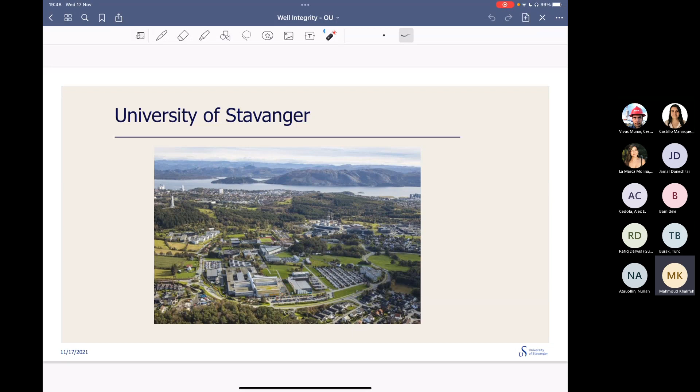A little bit about my university. Yes, I work at the University of Stavanger. Those that are familiar with Norway know where Norway is located. I will show you a Europe map. This is our campus area, this is north, and this is a drilling rig which is used for doing research. For your information, Norway has no onshore wells. All the wells are offshore. I'm coming from the Faculty of Natural Sciences, which is located here. And we have SWIPA, a lab for subsurface well integrity and permanent abandonment, which is located in this part of the building.

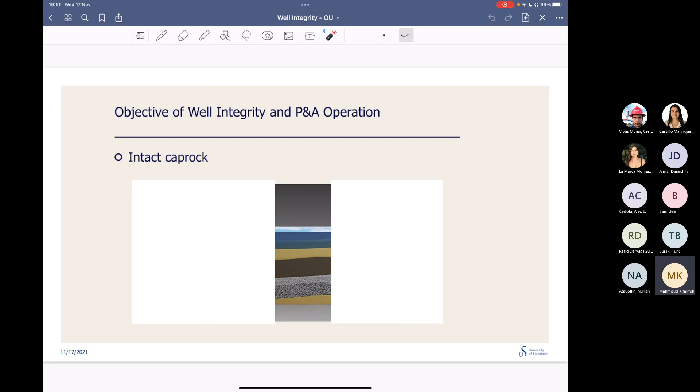So, assume that this is your reservoir. It doesn't make a difference if you want to call it a hydrocarbon reservoir, or a geothermal, or CCS. Okay. As long as there is a formation which contains the source of energy you're looking for, and there is a caprock on top of that, then this is a reservoir. It means that the source of energy has been trapped and cannot escape.

Okay. So what happens during drilling? Actually, the drill bit penetrates the caprock and enters the reservoir. What we do in the reservoir section is not of interest with respect to well integrity and P&A. What's important is the area where you have the caprock. If you could maintain this area, the caprock functionality, then this reservoir is secured and you can produce the type of energy you're looking for. Okay.

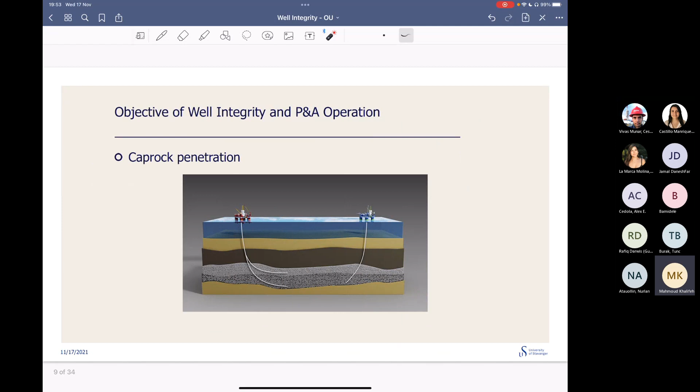Sometimes we have different wells drilled from the same area, which is actually a platform. And then we penetrate the caprock either one time or two times at the same depth. Okay. And we need to ensure well integrity in this area, which is caprock functionality. Let's talk a little bit about what was the real scenario. You have a reservoir, a source of energy, which was protected by a caprock. Now I'm talking about hydrocarbon wells.

When we drill through the caprock, we establish a barrier. Usually it's shown as blue, and we call it the primary barrier. The primary barrier, which you see here, is always engaged and in contact with the main reservoir, the source of pressure. And remember, pressure is your enemy. If you can control pressure, you maintain well integrity. If pressure controls you and your activities, then you lost the well integrity.

And we as human beings have learned that whatever can go wrong will go wrong. That's Murphy's law. And the primary barrier may fail. What will be your course of action when the primary fails? Therefore, we use a backup barrier, which is usually shown in red, and it's called a secondary barrier. So I call this one the primary barrier, and the red one secondary. It's important to emphasize that primary is always engaged, but secondary will engage when primary fails.

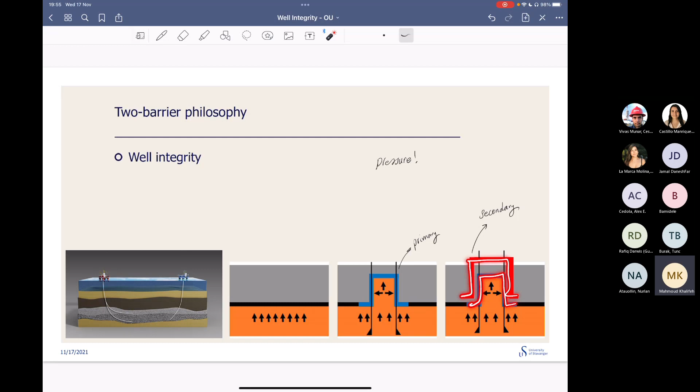If you look at the shape of this blue curve, it's like a hat. And the second one is like a hat over a hat. Sometimes we call this type of barriers hat over hat barriers. And we have been familiar with it since day one when we started drilling. Actually, as you can see in this part of the figure, when we construct wells, we use drilling fluid as the primary barrier. Therefore, it's shown as blue.

I need to ask a question: why was fluid acceptable as a barrier, or is it an acceptable barrier element? No. We should say fluid is not a barrier element unless there is a BOP in place. Why? Because fluid can be displaced. Fluid can get attacked by gas. But as long as you have a BOP in place, the BOP can control the source of pressure for you.

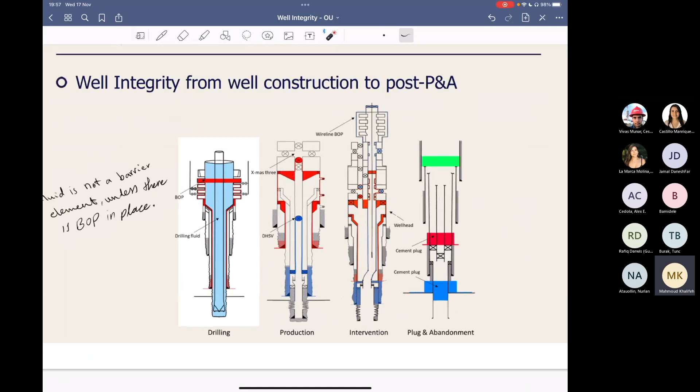Okay. And remember, we don't have any other option. We cannot select any other barriers, even if you had different casing strings, because as long as the wellbore is open and you do drilling, fluid is your primary barrier. However, after drilling, when we do completion and start production, we do not accept fluid as a barrier element. Okay, a well barrier, which I showed in the previous slide, actually consists of different elements, different components.

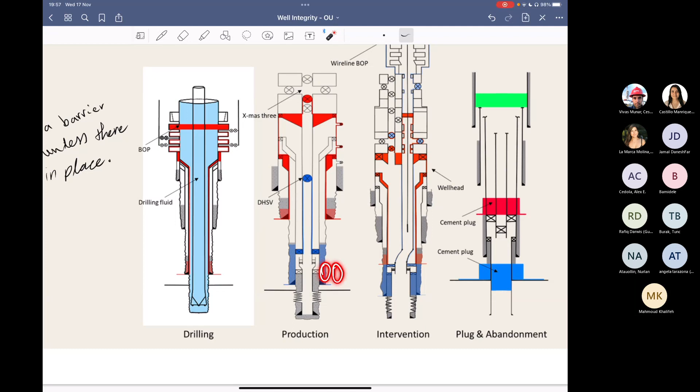It can be a formation, a competent formation, like caprock. It's cement, casing shoe, casing, all the way up to the packer, production tubing, its connections, downhole safety valve, and all the way back. Okay. As you can see, we have different types of well barrier elements with different properties. Some of them are cementitious, some of them are metal. And that makes our task a little bit difficult because they have different lifespans.

During well intervention, we also had primary and secondary barriers. When we have the riser and BOP, as you can see, the situation gets more complex because the blue, which was hat over hat, actually goes over red. That makes it a little difficult. Even with P&A, when you do P&A and post P&A, you have a primary barrier, a secondary as a backup, and a plug, which we call an environmental plug.

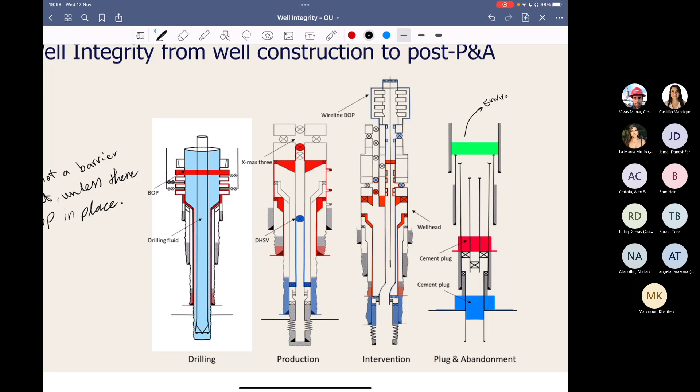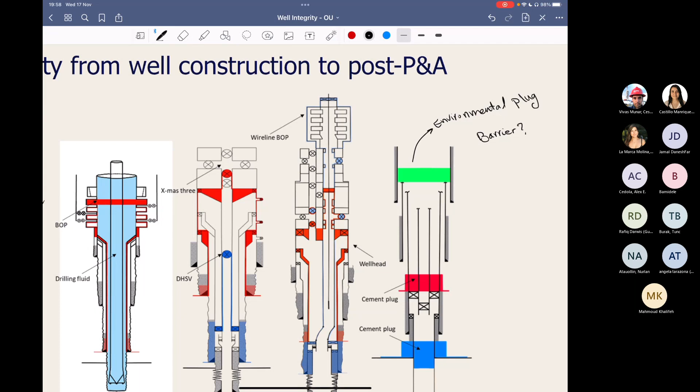Remember, I do not call this one a barrier. It's not a barrier. Why? Because a barrier has a definition. Let's focus on this case, production.

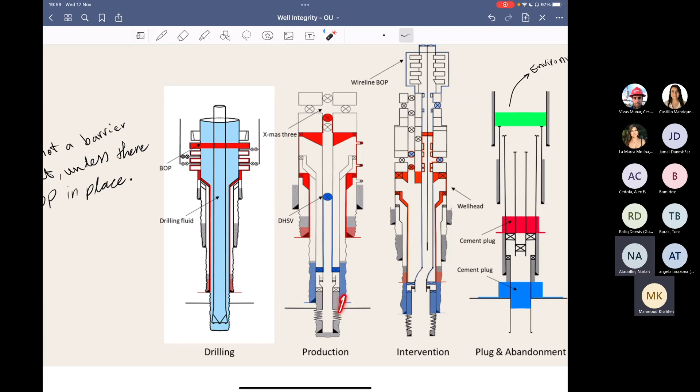Assume that you have a wellbore and you're trying to produce and you need to establish your primary and secondary barrier. As you can see, this formation is capable to hold pressure because it's a caprock. Okay? Casing shoe, production casing, usually placed in the caprock. And then when the source of the pressure comes, the caprock is able or capable to hold the pressure for you. Casing cement, casing by itself, and all of these components, they are capable to hold the pressure for you.

If this primary leaks, the secondary leaks, source of flow comes underneath of your environmental plug. Okay, plug is strong enough because it could be a cement plug. However, the adjacent formation, which is in a shallow depth, is not competent anymore because it's not capable to hold the pressure for you. So the source of flow comes here and then breaks, formation leaks to the surrounding.

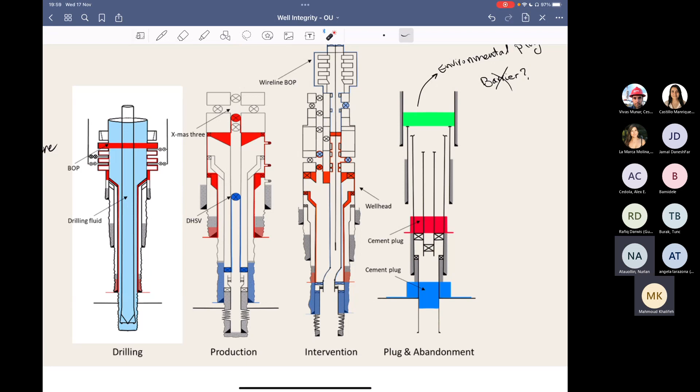Type of barrier could be cement from rock to rock in an open hole, or it could be cement, formation, cement, casing, production tubing.

Moving forward, what are the consequences of loss of well integrity? You guys, you work with geothermal energy. Okay. We don't have so many geothermal wells compared to oil wells or hydrocarbon wells, but there will come a time where the number of geothermal wells will be much more than oil wells. Either oil wells get closed and the number of geothermal will increase, or all of the hydrocarbon wells will be closed completely and few geothermals will be available in the market and producing energy.

The fate is that oil hydrocarbon wells will just die out or phase out. Okay, but I would like to get your attention on some well integrity issues which happen to hydrocarbon wells. I couldn't find any actual incidents on geothermal wells so far, few well integrity issues, which were not actually dangerous. But we should expect them to happen because the number of geothermal wells will increase.

Okay, you guys, you're familiar with Macondo. For sure, you had it in your courses, you have seen the movie, you have read the report, and you know lots of things about it. Why cement was not qualified, and then it was assumed that it's qualified, and then the barrier failed. Actually, this is a consequence of barrier failure.

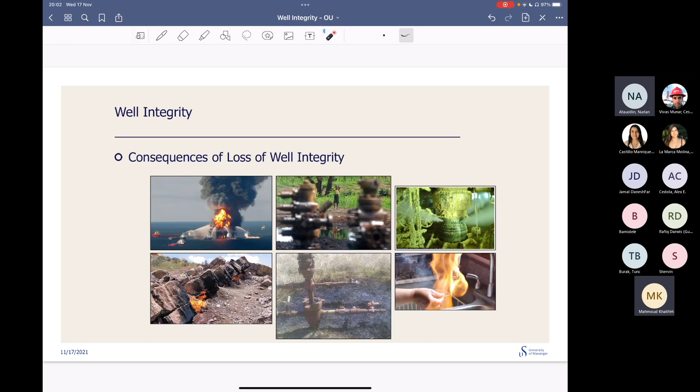US. I go to Africa. See, oil is leaking to the surrounding. I go to the UK sector of the North Sea. I go to Florida. If I remember, this one should be Canada, and this is Iran. Okay. What I'm trying to say, well integrity is not a concern only in one country or in one location. It's everywhere. As long as you have a wellbore and there is a source of pressure, no matter if it's carbon dioxide, geothermal energy that you're trying to produce, or hydrocarbon, regardless, that could be a concern for us.

But in this presentation, I'm going to review well integrity and permanent P&A, and then we will expand it a little bit, why they are connected together. Okay. Let's focus on well integrity. So, well integrity operating philosophy tells us how to manage the risk of loss of containment. As long as you have control on it and you know where the fluid goes, you maintain the well integrity.

And not overexpose oneself with additional risk by frequent well visits and interventions that bring exposure to the people and environment by doing these activities. So it engages both people, human beings, and environment together.

PSA, Petroleum Safety Authority of Norway, publishes reports every year, which we call RNNP. This report is in Norwegian. Sorry for that. This one is English, but this one, yeah, this is Norwegian. And every year, you can just refer to the website and find the report from the year before.

It shows the number of incidents with major accident potential, which doesn't include helicopter or chopper, okay? As you can see, the number of incidents offshore Norway decreased over the years, which is encouraging, and tells you about what kind of incidents we had.

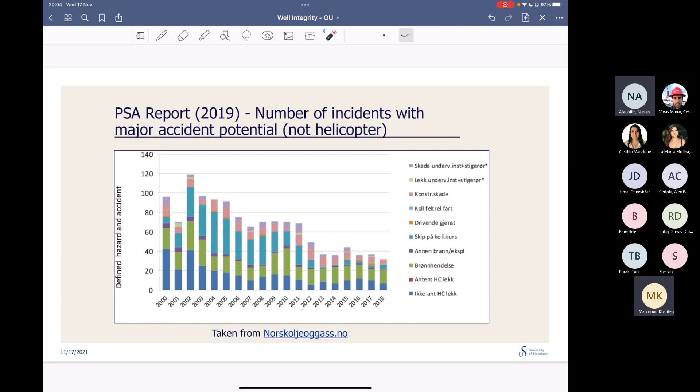Okay, it's construction damage, it's a kind of leakage, or it's damage which happened to the pipes or equipment. So you have an overview of different incidents over years.

Moving forward, you can actually find the number of well control incidents in the report as well, which is interesting, because for exploration wells, you see that well control incidents are much higher than for production drilling. Why? Because when you do exploration, you are not familiar with the reservoir. There are lots of uncertainties, and you need to drill in a dark room.

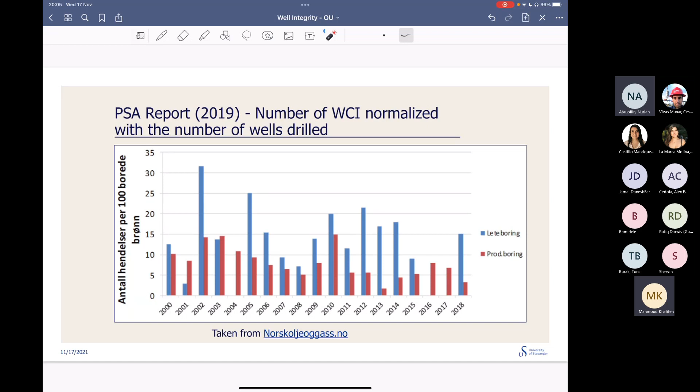That's what happens. For production, you are familiar with the environment, but it doesn't mean that you're not going to have any incident. As you can see, there have been incidents, and the rate was changing or varying over years.

Moving forward, focusing on the wellbore by itself, a study conducted by Birgit Vignes in 2006 shows that there are different challenges associated with well integrity of production wells and injection wells. As you can see, well integrity is not only about cement. It includes wellhead, annular safety valve, casing, pack-off, all the way to the formation as well. Sometimes you can frac the formation by accident.

Interestingly, you see number of wells and age. Wells older than 20 to 24 years or 30 years have fewer well integrity issues. That's not correct. The conclusion from the paper, and industrial experience, is that when you have wellbores which are old and have old well design, you don't gather information that often from them.

However, in new wellbores, you have smart wells equipped with different instruments, and you can actually log data. You can log information, digitalize it, and document it. However, for old wells, you don't have that. And some of these old wells have been left for some time, and are even in a temporary abandoned status. There is no monitoring on them, and we don't know what's happening.

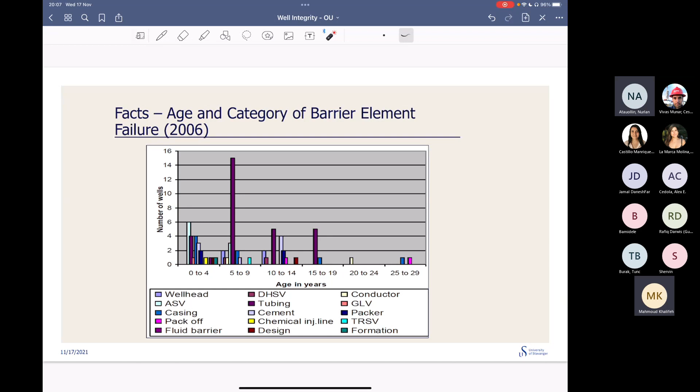So a little bit about the number of wells and well integrity issues. As you can see, tubing creates lots of challenges, and it's the most common one. And that's actually what we expect, because we use tubing to avoid damage to the production casing. We can change tubing, but we cannot change production casing. Gas lift valve, okay? And remember, this data is for the wells studied, not all the wells in the North Sea. There have been issues with cement, with casing, packer, and wellhead.

I usually give examples to people. For sure, for geothermal, you don't have the same challenge, but you will be faced with this challenge in the future as well, when we go deeper and deeper to explore energy from high temperature reservoirs. In the old days in the North Sea, we were putting BOPs on the wellheads which were 50, 60 metric tons. Nowadays, we put BOPs on wellheads which go up to 400 metric tons in weight. And we give lots of stresses during production. We have sea current, which gives fatigue to the wellhead, and so on.

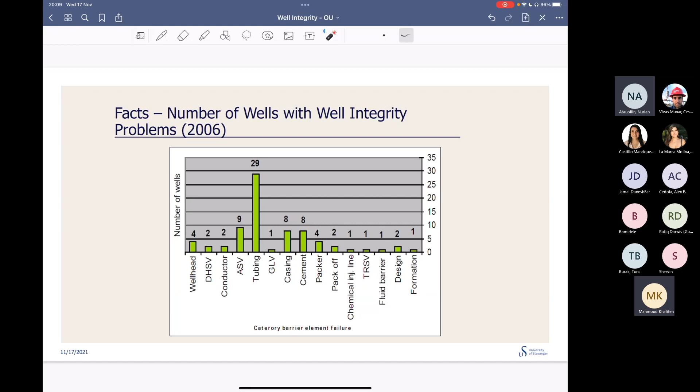And when you go with geothermal or carbon sequestration, it's the same. You increase the reservoir pressure. You increase the pore pressure. A depleted reservoir starts to get lifted up. And then the minimum horizontal stress is enough for you to get a leakage through the formation all the way up.

Monitoring. We are not in the 80s. Now we are in the 20s. We have lots of technologies. We have lots of tools, instruments, which we install in our wells, and we build smart wells. Lots of sensors gather information. Someone should be sitting there to review those data to see what's happening, what those data are telling you.

Knowledge sharing within the company and with other companies. We have in Norway the Well Integrity Forum, where experts from the well integrity field sit together and share information, because well integrity means,

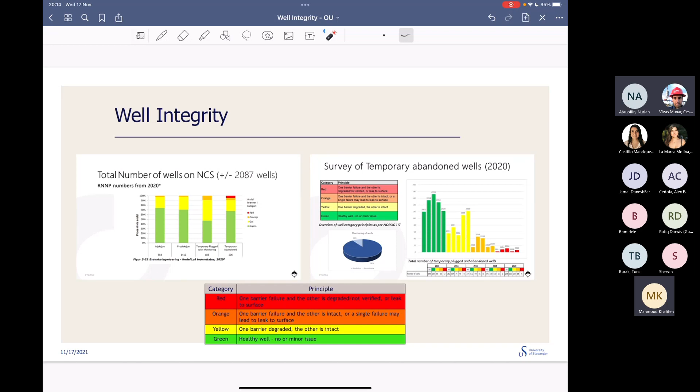As you can see here, for wells with injection, the majority are green, some are yellow, and a few are orange. Wells in temporary abandoned status without monitoring means they left the well there. There is no monitoring, no one checks them. When they went to check the wells just by accident, they found out a few of them are red, and the majority are green. We have two different types of temporary abandoned status, which we call temporary abandoned with monitoring and without monitoring.

Means that in monitoring, we actually log pressure and we test barriers regularly. What's the definition of regularly? No one knows. Sometimes some people do it every year. For some other wells, people do it every 6 months.

And then moving a little bit forward, survey of temporary abandoned status. I would like to have your attention. As you can see, the number of wells with the red category actually increased in 2016 and then decreased in 2020. Remember, these color changes are the result of probabilistic simulations. If you change a regulation or if you change a parameter, then your simulation will change and you may actually fall to red or to orange or to green.

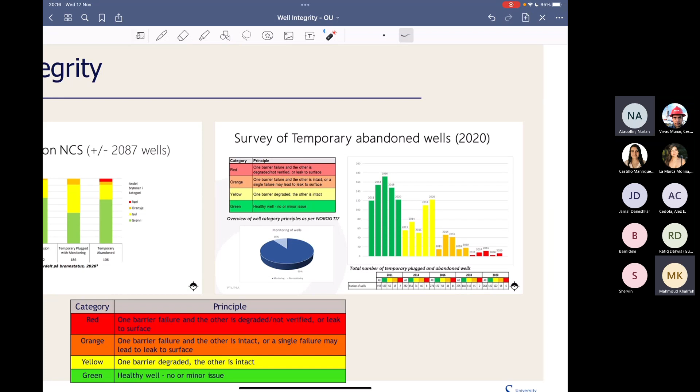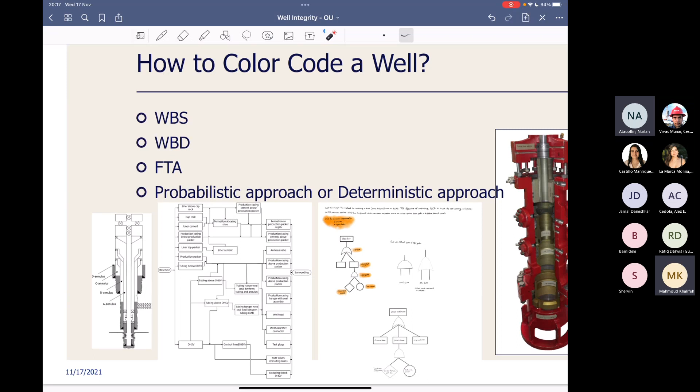After we make the wellbore schematic, we create a well barrier diagram. How it works: you put your reservoir, and then you select your primary barriers. When you select your primary barriers, you put all the elements of your primary barrier in a column, as I have done here. Then from this point, it's like a game. You say, okay, this reservoir can expose my production tubing below the downhole safety valve. If it leaks, where does the leak go? The leaks can go in different paths, and you have to identify all of these paths and write them down. And all the time you have to end at the surroundings. Sometimes the surrounding could be surface, or it could be a formation in the overburden, and you have to specify what you mean by surrounding.

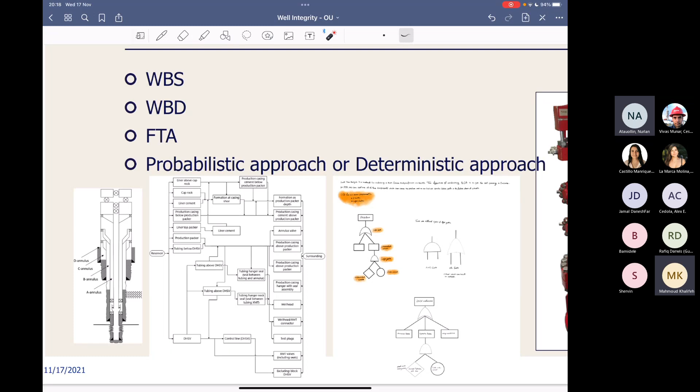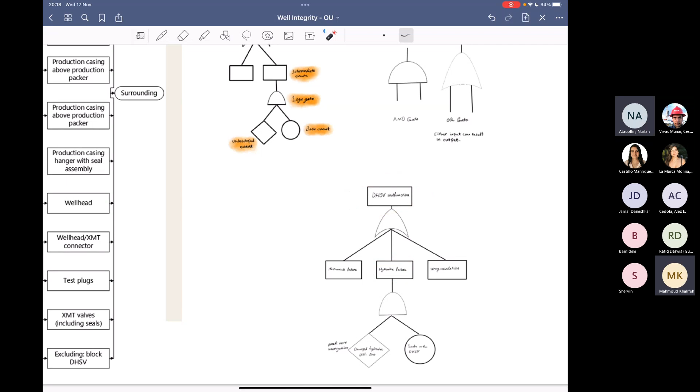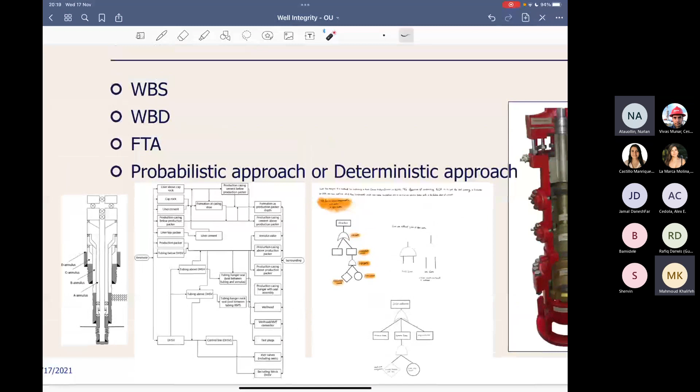And when you have all of these leak paths, you go with fault tree analysis. This is a very simple definition of fault tree analysis. For every component in your well barrier diagram, you allocate a number and ask, what are the consequences? Usually you have a top event, and then you have to find out how this top event is going to happen. As an example, if there's a leak in the downhole safety valve, it leads to hydraulic failure, and it can give me downhole safety valve malfunction. After you have the fault tree analysis, you allocate a range of numbers to each top event, and then you do simulation to find out what the risk is.

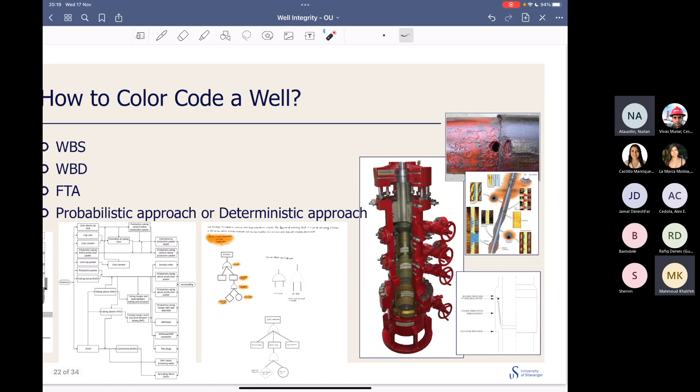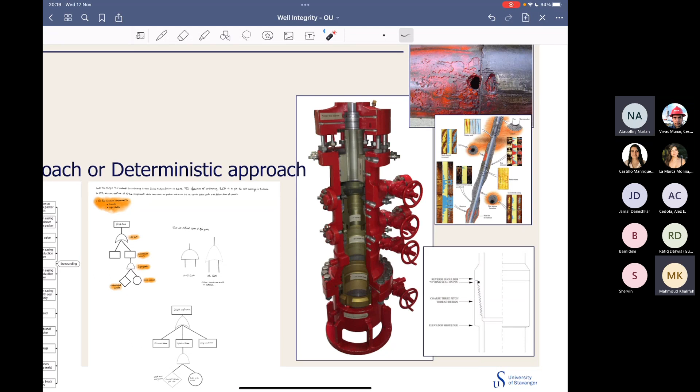I have here some photos to tell you that this well barrier diagram should be more detailed and more advanced than you imagine, because you may have corrosion in your production tubing, a poor cementing job, or a combination of good and poor cementing. You have lots of connections in your casing, casing could be corroded, cement could be corroded, cement-casing can be debonded, cement-formation can be debonded, and then all the way to the wellhead. People usually write wellhead. No, the wellhead is not just one component. Wellhead has lots of valves, lots of connections, seals, and lots of tubing hangers or casing hangers. All of these together. We don't want to have any leakages from this one out.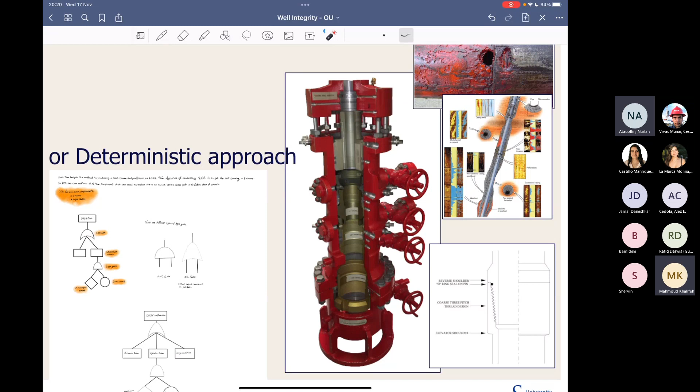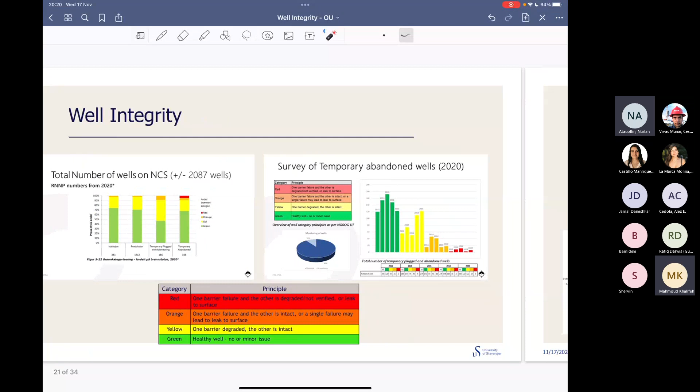So you have to give a number to every component. People with industrial experience will tell you, for example, how often you should expect to get a leak from connections or from the starter head and so on. All of those numbers come together and give you the kind of color you could see in the previous slide. So that's not a straightforward task. A little bit now about geothermal wells. What kind of well integrity should you expect? Talking about Iceland. Iceland is a special case, but an interesting case.

Equinor is active in Iceland doing lots of research, and we are in tight contact with people at Equinor and also researchers. When we do drilling in Iceland, usually the temperature is around 500, 550 degrees C. That's a really high temperature. And we do drilling with no return. That means we just pump fluid to push the cuttings to the reservoir or to the formations, and we don't get any fluid out during drilling.

In this way, the temperature falls from 500 to 550 down to 50 degrees C in the vicinity of the wellbore. Okay, now your situation becomes complex. You are on loss of drilling fluid because you do drilling with no return. At the same time, you cool down the vicinity of the borehole. Okay, now you need a cement.

This cement is tricky because if you make it for high temperature, to survive high temperature, it's not going to set at low temperature, at 70 degrees or 50 degrees. If you make it set at 50 degrees, then it's not going to tolerate 500 degrees. That's one of the challenges. Number two,

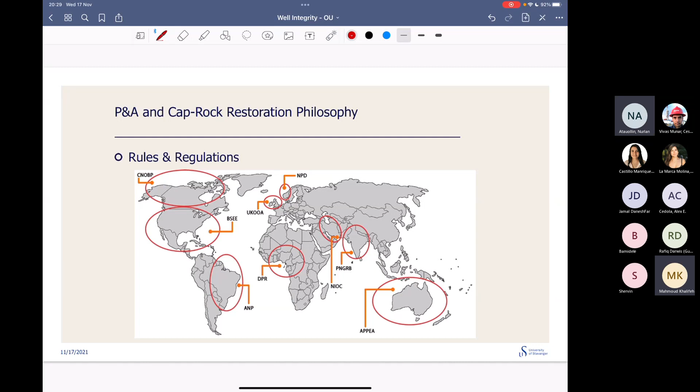In Norway, we have PSA, as I said, which stands for Petroleum Safety Authority. And interestingly, in Norway, we have a standard. Usually people think that this standard is a regulation, which it is not. That is a misunderstanding. This is only a standard drafted by operating companies and service companies to help those companies which don't have much experience with well integrity and well abandonment.

So who made it? As I said, experts from operating companies and service companies. PSA, the Petroleum Safety Authority of Norway, has its own regulation, which is only 2 pages: Section 48 on well barriers and Section 88 on securing wells. Making an abstract of those 2 pages: give the wellbore or reservoir back to me the same way as I gave it to you.

So then why do we have NORSOK D-010? Actually, as I said, it is a help to the companies. And interestingly, the Petroleum Safety Authority and myself are sitting there as observers. We look at the industry and learn how they discuss, what the arguments and reasoning are behind proposing such solutions or approaches in the standards.

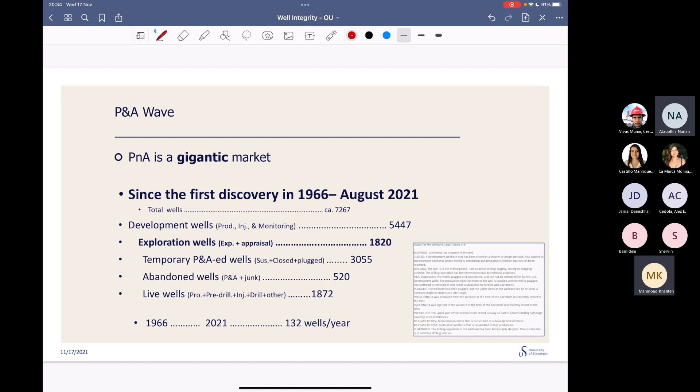Means that if we want to do plug and abandonment, as an average, we have to do approximately 60 to 100 wells a year moving forward. In the North Sea, we use around 20 to 60 days to do a plug and abandonment. And as an average, we say that a well is going to take us 30 days.

If I have a rig and the rig can do actual P&A on 12 wells, then it's equal to 1 year. Then the question is how many rigs do I need to plug and abandon all of these in one year? Or if I plug and abandon 50 wells every year, how long is it going to take me to plug and abandon all of these wells?

Working in the field of well integrity and especially well abandonment, I want to tell you, in the North Sea, if we decide to plug and abandon all of the wells which are active and those in a temporary abandoned status, we need to do plug and abandonment for the next 20 years at least, the next 2 decades. And that's the market for people.

Yes, several factors affect the wave size. Guys following climate change and COP26 know what happened, even with coal, which disappointed us. We thought maybe coal was going to phase out, but they said it's going to phase down. And then the corona pandemic arrived. Many wells went into a temporary abandoned status.

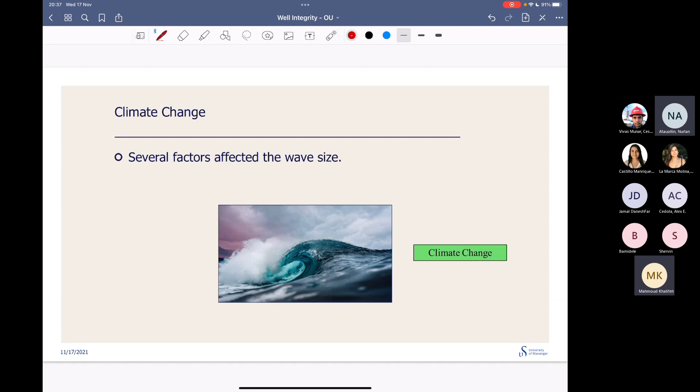That means we need to do a good job so that we can use or reuse these wellbores. So, challenges with plug and abandonment: there are lots of factors which make this wave much bigger than we assume, because when you spend more time on a wellbore, you don't have a rig free to do the P&A on the other one.

The challenges, I can say, lack of data. Interestingly, even for wellbores drilled in 2000, we don't have that much information about them. And I'm puzzled because I'm in Norway and lots of data are available. People are really good at documenting information, but we lack lots of data. Those data could be cement, type of cement, quality of cement, annulus pressure, and as I said, documentation. People constructed the well, they used drilling fluids in front of cement, and we don't know what kind of drilling fluid is on top of cement, and we cannot recirculate them, and we cannot even handle them.

Old wells or orphan wells: you guys in the US have lots of orphan wells. Wells drilled, produced, and left behind, and no one is the owner of the wellbore. Old wells which have severe well integrity issues. As I said, you can start from the Christmas tree, go to the wellhead, from the wellhead to the tubing hanger, all the way down to the reservoir. Lots of issues. And subsidence. As I said, the Ekofisk field in the North Sea subsided; the whole reservoir subsided 8 meters from the seabed just because of the production, and then was lifted up by injection.